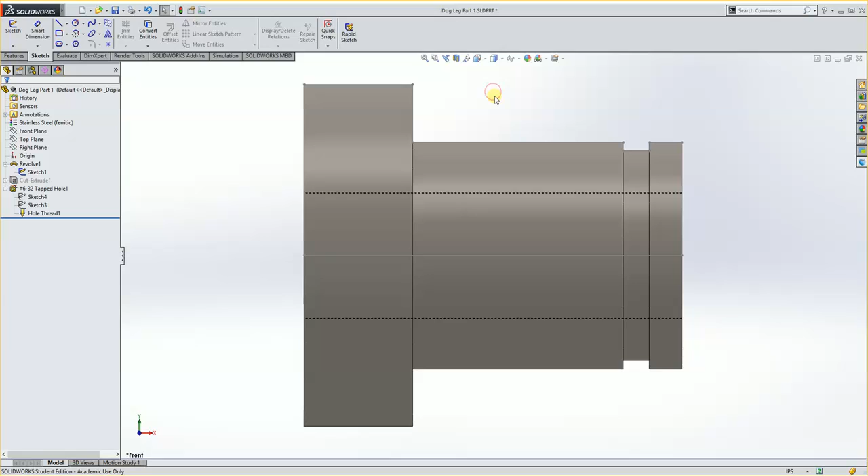Next thing I want to do is create a sketch inside of here, so I'm going to go into my front plane. I need to tell it I want to draw on the front plane, and I'm going to create a line. Then I can choose my endpoints here, here, here, and here. And then I'll go up and close the sketch in the confirmation corner.

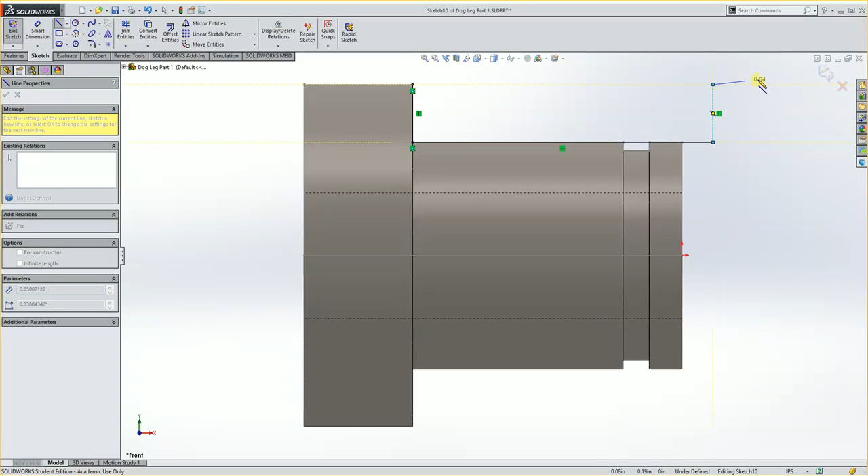I'm going to make one more sketch on my front plane again. I'm going to create a line from here to here, and then come all the way off my part a little ways. Click somewhere out here, then up until I get a dotted line that matches my other side. There, and I'll hit OK. Now I have three sketches: the original that I'll use for turning the outside, the sketch for this little groove, and the sketch for this area that I want to clean out.

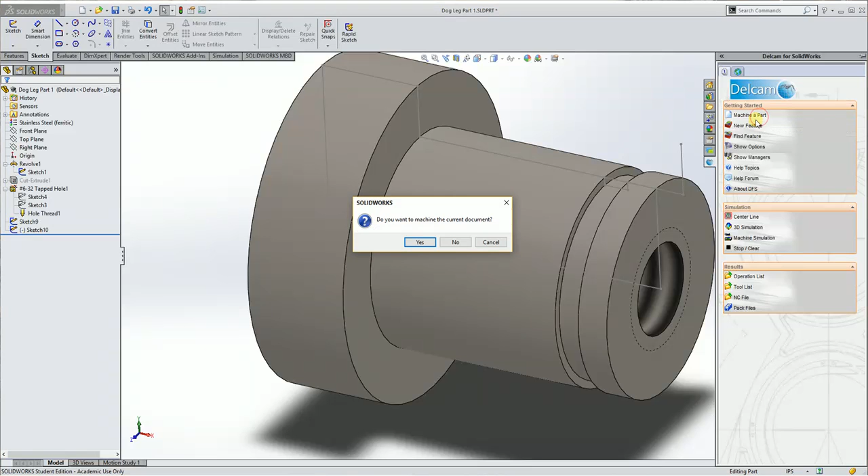So at this point we're ready to pull this into the assembly environment and program it. I'm going to go over to the Delcam for SolidWorks icon here, and go to Machine a Part. Do I want to use the current document? Yes. And I'm going to use the Madison College inch turn, and I'll hit open.

And you see when it brings it in here, my z-axis is not aligned with the end of my part, which is okay, I just need to make sure I change that. So under stock axis here, I can just pick on the face that I want the z-axis to be on, and you'll see that now the blue is pointing up.

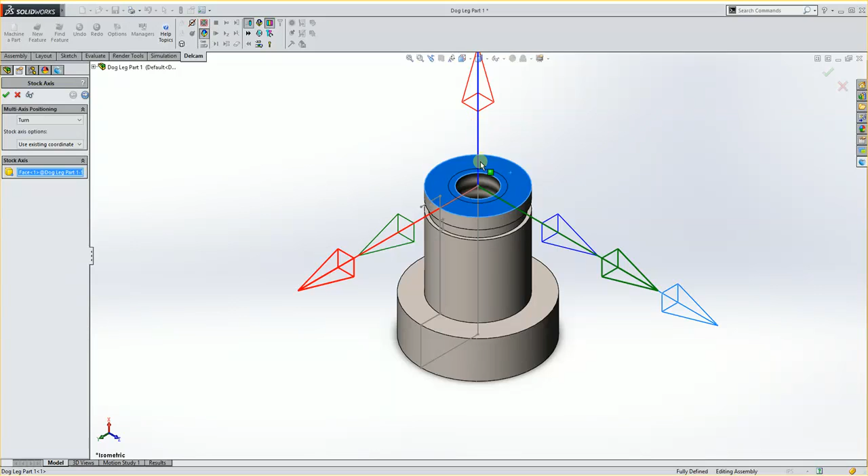I can then hit my next button here, and I want to use a bounding cylinder, which is the default, and I just choose my part, and it will give me some rough stock.

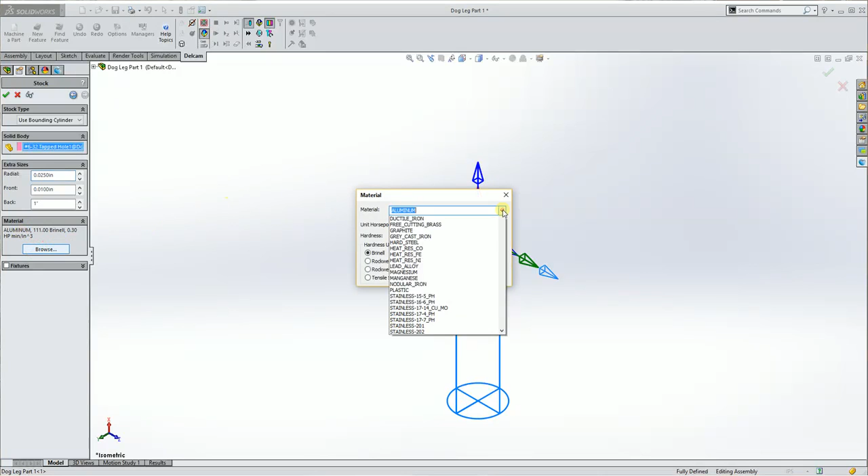On the back of the stock, I'm going to type in maybe 1 inch of extra material for simulation reasons. On the front, maybe 10 thousandths, and radially 25 thousandths, just extra material for it to turn off. For my material, I'm going to browse and choose this to be stainless, and I'll hit OK.

I'm going to accept this by hitting the OK button. Now it's asking me for my stock axis, or my setup 1, and you'll see that because I had chosen this face, it is already in the correct spot. So all I really need to do is hit OK.

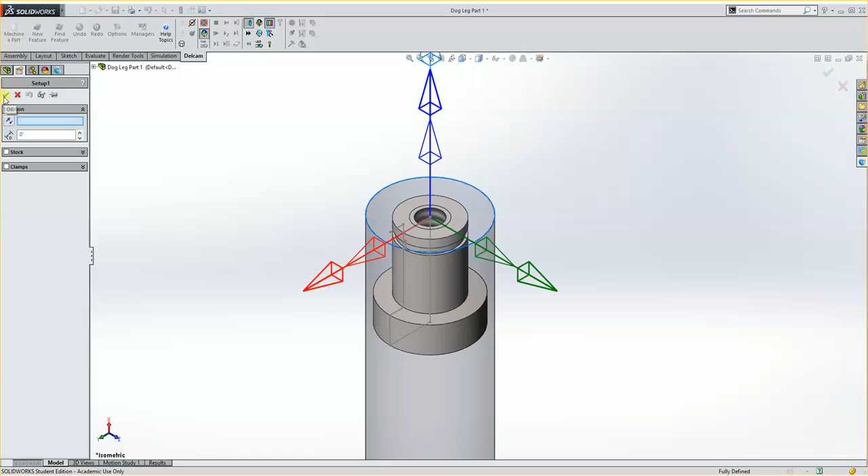I'll rotate this around a little bit so you can see. So everything here is now ready to go, and we do have our sketches here, so we can choose those as we need.

First off, I want to make sure I'm in the Tools Inch library. So under Managers, I'm going to click on Tool Library, and I want to make sure it's Tools Inch, so we're all working in the same spot. And I'll hit OK.

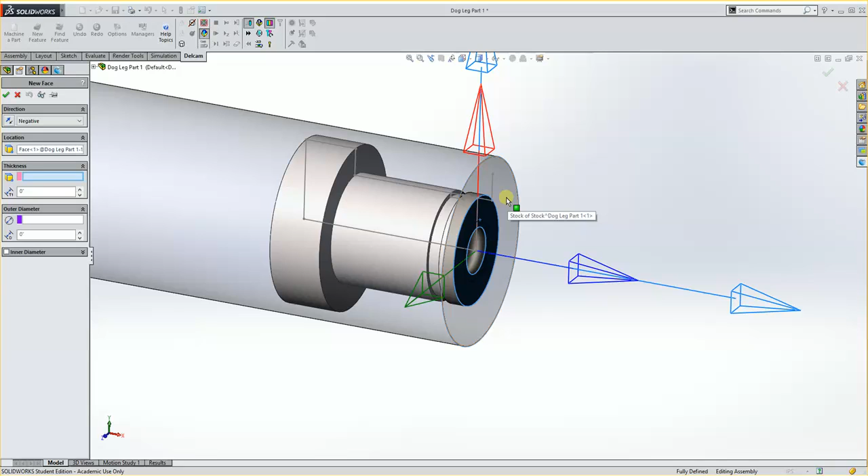And now I'm going to start programming. First, I'm going to face it off, so I'll go to New Feature. I want to do a face. I'll hit OK. My location will be the end of my part, make sure you're getting the part. My thickness will be the outside of my stock here, and my outside diameter will be the outside of my stock. You'll see I get this blue simulation of what it's going to be, so I can hit OK.

Now if I go to my DFS Features tab here, you'll see that I have a rough and a finish. I really won't need the rough, but I'll leave it on.

It just does an extra pass in case we have a little extra material out here. I can double click that to see what tool it's using to turn it, and you'll see it's using an 80-degree diamond. It's okay, but I think I want to use a 55-degree diamond, so I'm going to double click here and change this.

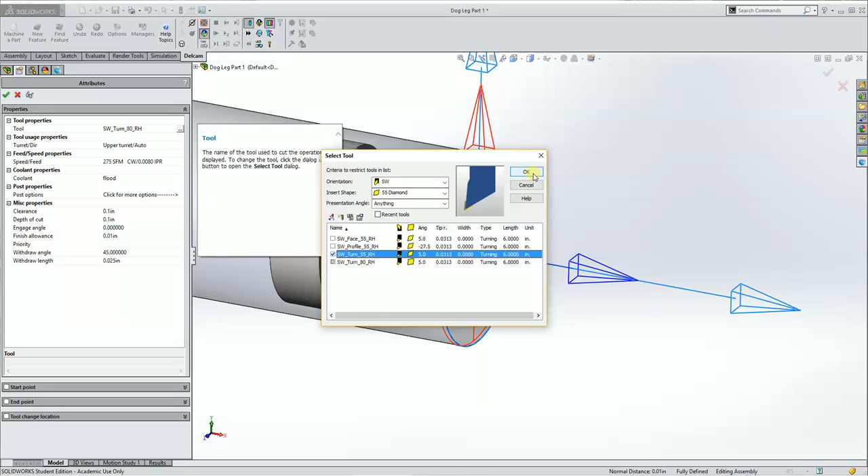I'm going to change this to a 55-degree diamond, and I'll grab the 55 turn right hand tool and hit OK. My feeds and speeds should already be set up for stainless right here, so I'll hit OK. Now if I simulate it, you'll see it faces the end off.

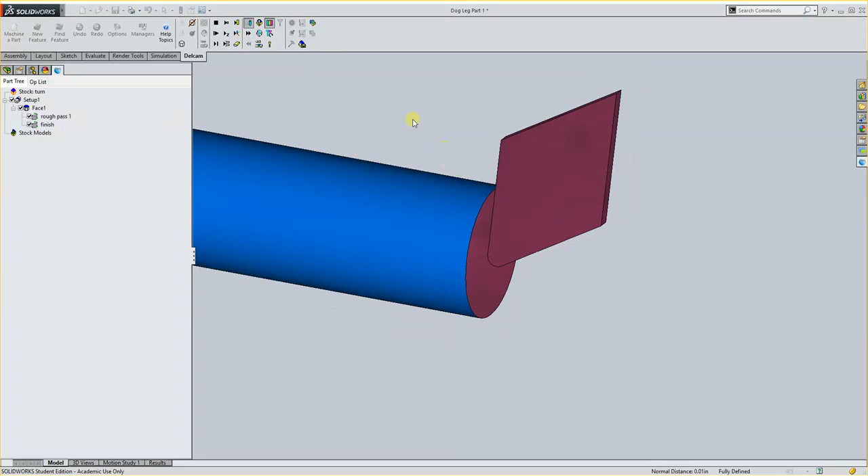Not too much to it there. Tool comes in, faces down my part. I want to look at it with the tool holder on, so I'll do that. And I'll stop it.

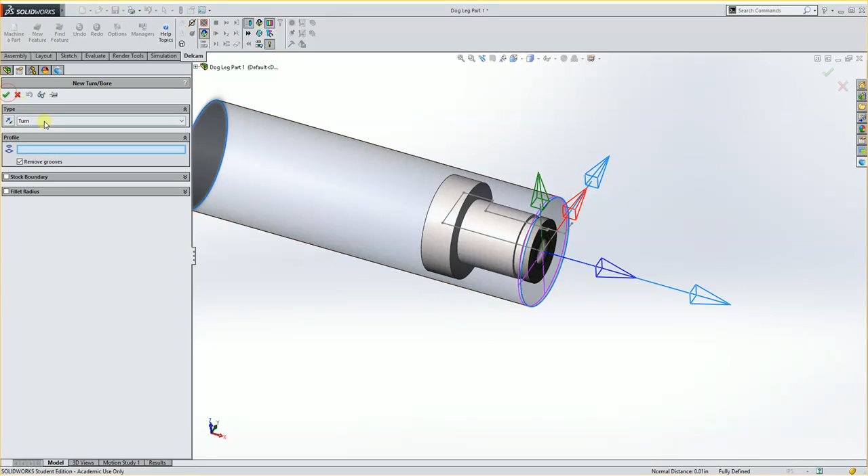Alright, so I want to do a few more things. I want to do just a rough turn off the outside. So I go to New Feature, Turn Bore, and hit OK. I'm going to do a turn, and my profile will be this outer sketch. Don't worry that it goes down the back, it won't actually cut that. I do want to check the box that says Remove Grooves, because I don't want to try to go into here. And I'll hit OK.

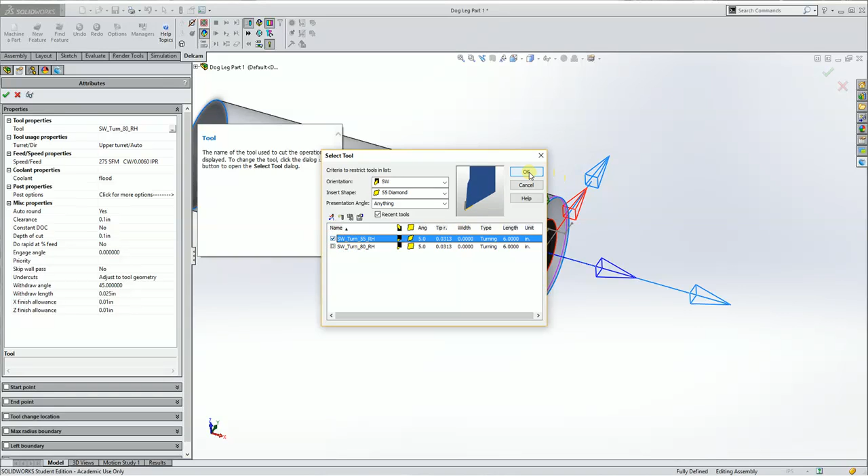I want to see what tool it used there. If I double click on Rough Pass 1, it's using the 80 again, and I'd like to double click this and make it use the 55. A little trick here is that I can just click Recent Tools and then make it 55 — that will only give me the option of the one I've used before. I'll hit OK. Again, my feeds and speeds look fine, so I'll accept this. Now it will usually update the finish tool to match.

Alright, so I have that. If I play it now, you'll see it come in and rough that off — faced it, roughed it off here, finished it — but you'll see this little radius right here, and I want to get that out of there.

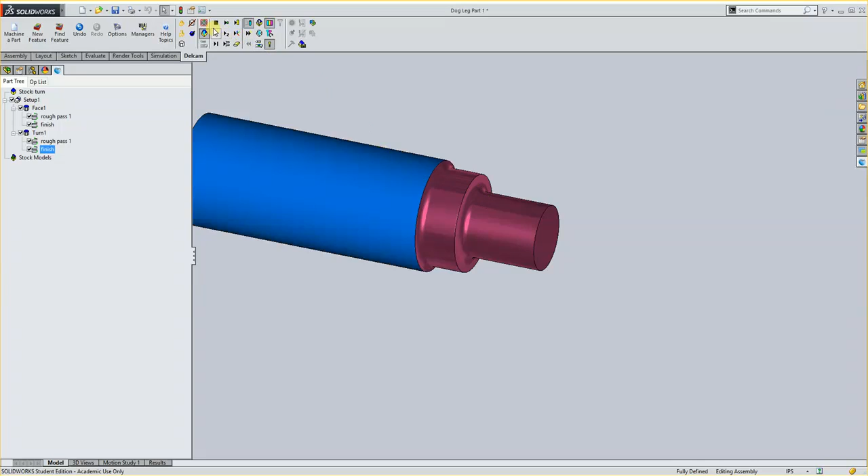So what I'm going to do is groove this out. I'm going to go to New Feature, Turn Bore, and we'll use Groove — that would be the better option. I'll hit OK. It's going to be an OD groove from a curve, so make sure this From Curve box is checked, and then I can choose this sketch here. You'll see it's just going to try to groove that out, and I'll hit OK.

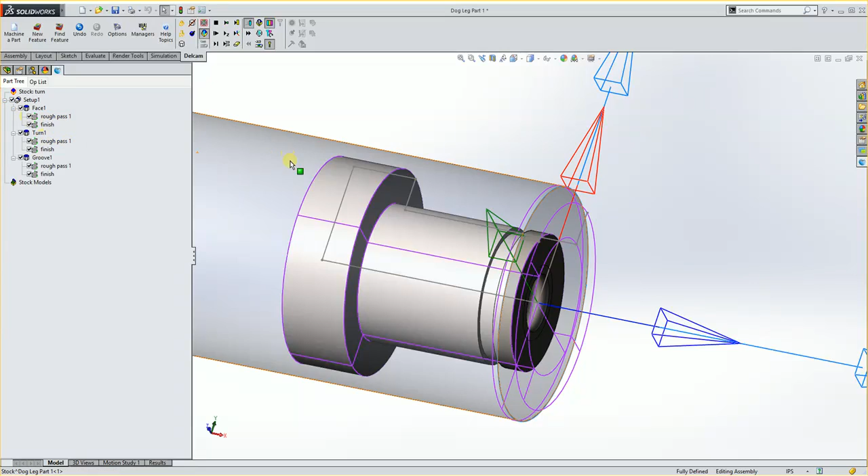Now if I double click on Rough Pass 1, you'll see it's going to try to grab a quarter inch grooving tool, but ours is approximately a 165 tool. So I'm going to double click Tool, uncheck Recent Tools, and look for the one that says 165 Groove here. I'll select that and hit OK, then hit OK again, and that should update the Finish tool as well.

We'll use that same tool to cut it off later, but before that, I'm going to groove this out. So I'm going to do another New Feature, this time a groove again, but my curve that I select will be this one here. You've got to make sure you don't get the whole outer side one, and if you're having a problem getting that to choose, you can always go through this pull-down menu here.

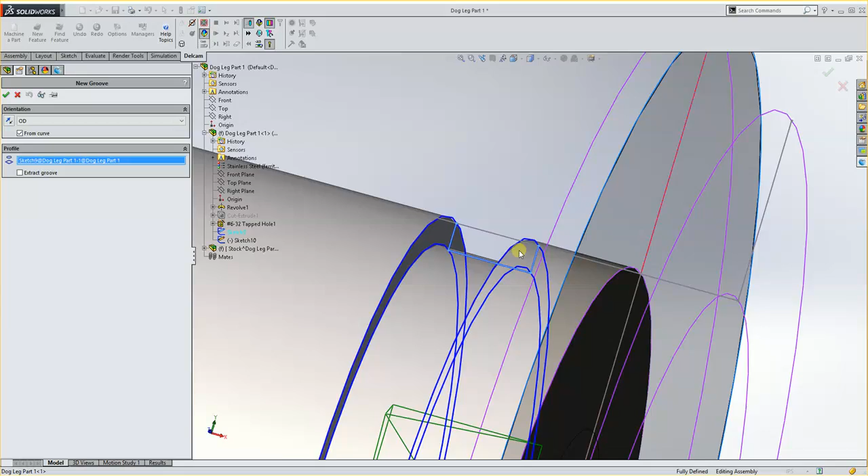I can see I have my sketch number 9 I can choose. I'll hit OK, and I get some errors here because I can't actually do it — I don't have a 29 thousandths wide grooving tool.

So first off, I'm going to turn off the rough — I just want it to plunge right in. So I turn off rough and double click Finish. It says unable to select tool, so I'm going to make a new one. I'll double click Tool and just find any little cut tool. If I find like a 094 here, I'll go with a cut grip so it's a shorter one — this is the 125.

I'm going to click on New Tool, and it will use this tool that I chose as a template, so I can redo this one. Instead of a copy of this, I'm going to delete that and do an SW cut grip.

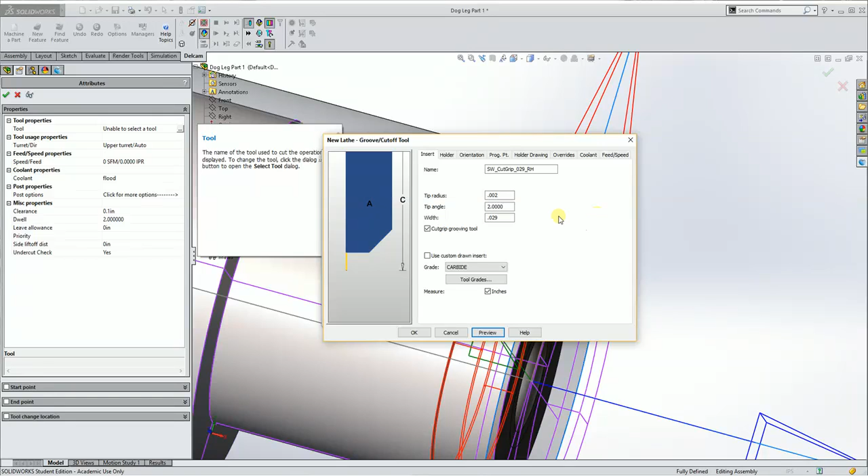I'm going to change this to 0.029 for my width, and my tip radius I'm going to change to maybe 0.002. This tool again is a special tool. I'll hit preview so I can see it. It's really small here, but this tool is something your instructor will have, so you'll ask whoever your instructor is and they'll be able to find it for you.

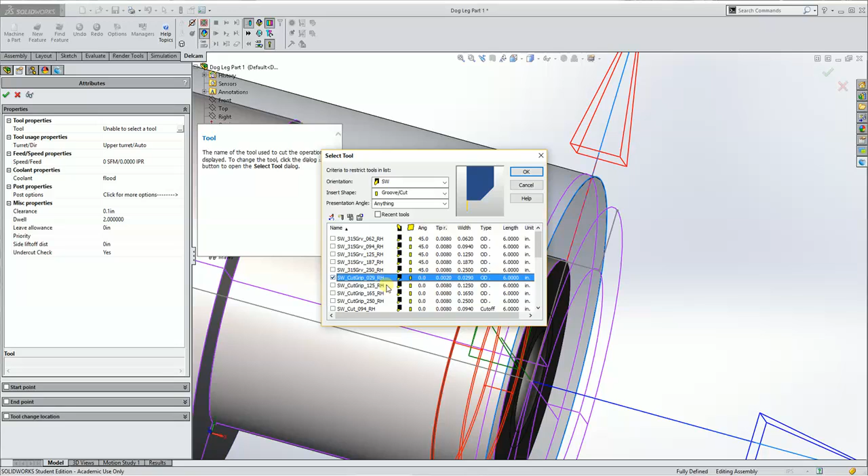I'll hit OK. It'll ask if I want to change my starting corner to a different spot, and I'll say yes. Do you want to use this as the override? Yes. So now it has that tool in the library. Again, that's only in the library on this computer, so if you go down to the shop to do this, you'll have to create the tool down there as well. Now I'll hit OK.

Now I'm going to accept this. You'll see that it's not errored out. If I simulate through this, I'm just going to single step it. You'll see it face off the end.

Come in here, I'm going to fade out a little. This kind of roughs this off a little, then it should come in here and finish it.

Then it's going to come change tools to the little grooving tool, and it really won't touch much until it gets into this corner. Actually, the roughing didn't do anything at all, so we could probably turn the roughing off. Then the finish comes down like that, comes to the other side, comes down, and feeds across and up. So instead of letting it cut that air like that, I could end up turning that off.

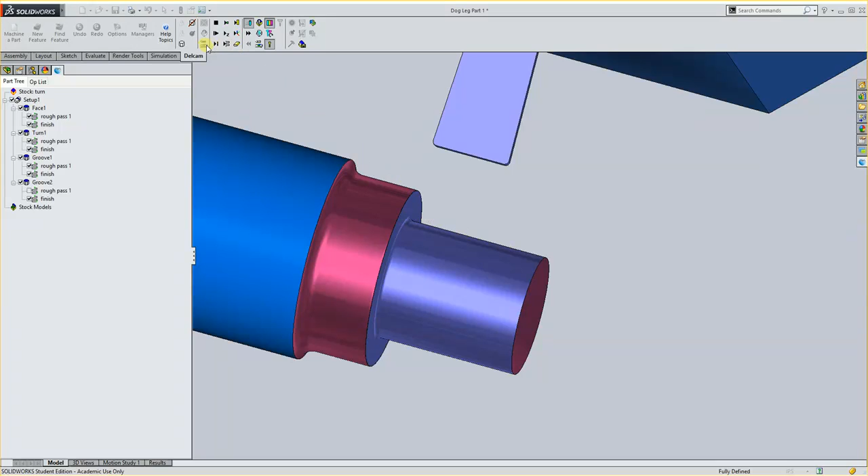So my next tool then comes in, switches out, uses this little grooving tool, and it goes in and puts that little groove in there. That'll be for like a little lock ring that'll go on the part. So I'll stop it here.

Again, under this groove over here, I can turn this off because it didn't actually hit anything, so there's no point in letting it post out.

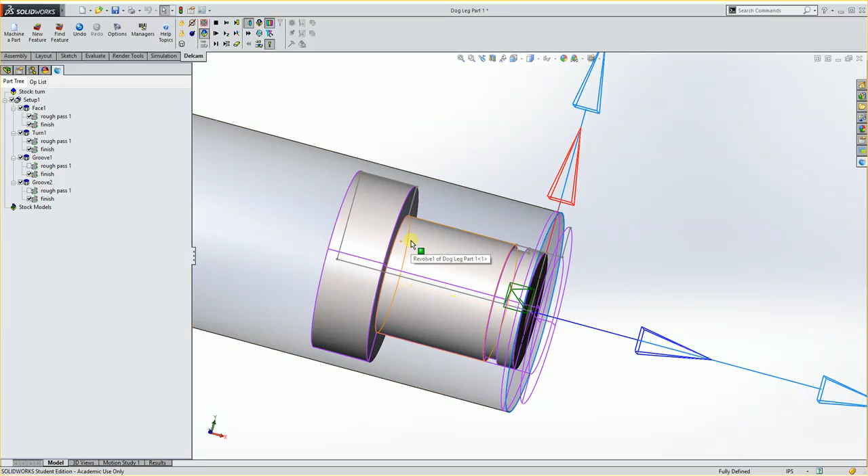Now I need to put a hole through the middle. So I'm going to do a new feature, hole, and I will hit OK. It's going to be a plain hole that goes through, so I can check that.

The diameter, if I just choose the inside cylinder here, it'll give me the diameter. It's going all the way to here, but I want to add a little bit. So on my bottom, I want to choose this face, and then tell it to go an additional 0.0625 or so to make it go through.

Now we'll do the tip comp because we told it to go through, but I just want it to go a little further as well. And then I'll hit OK.

Now it will just drill it in this situation, but we want to spot drill it. We'd have to come up here to Options, and under Drilling, click Spot Drill, and hit OK. Now you'll see it spots it and drills it.

Now I can simulate through the whole thing. I have pretty much what I want. I do need to cut it off.

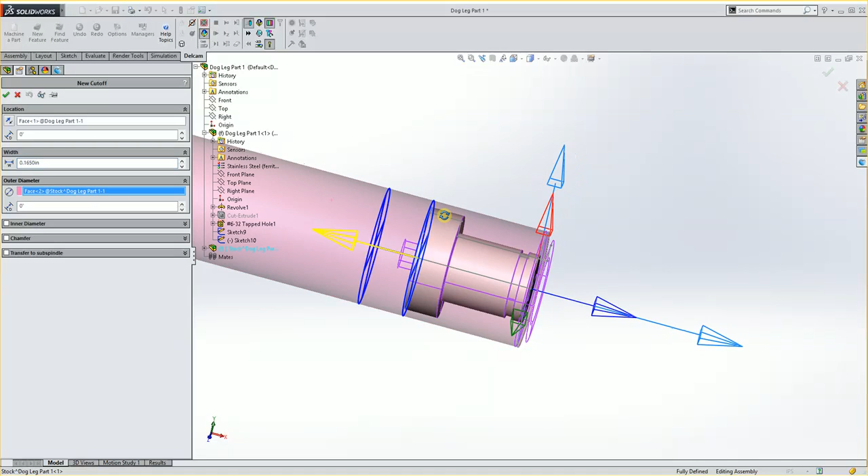So I'm going to do another new feature, cut off. Okay, and my location for the cutoff is the end of the part. My width is going to be 0.165 for the grooving tool. The outer diameter is here. You'll see it puts that in there. And I will hit OK.

Let's do the cutoff right here. I usually like going into the cutoff and just checking my feeds and speeds. It's actually not too bad. So I'll hit OK, and now I can watch it here.

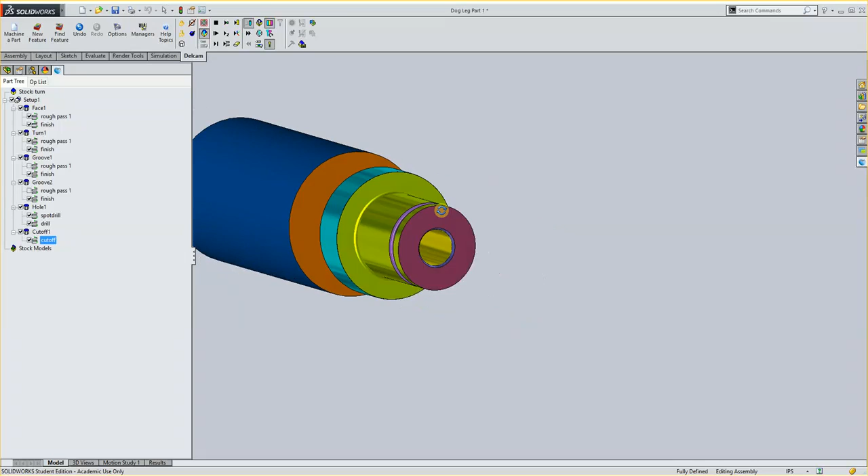And I get a good finished part. After this, you'd have to hand tap this with a 6-32, or you can use the flex arm. Then you'd set this up on the wire EDM with a special fixture that your instructor also has, and do the wiring of the dovetail here at the end. So this completes part number 1.